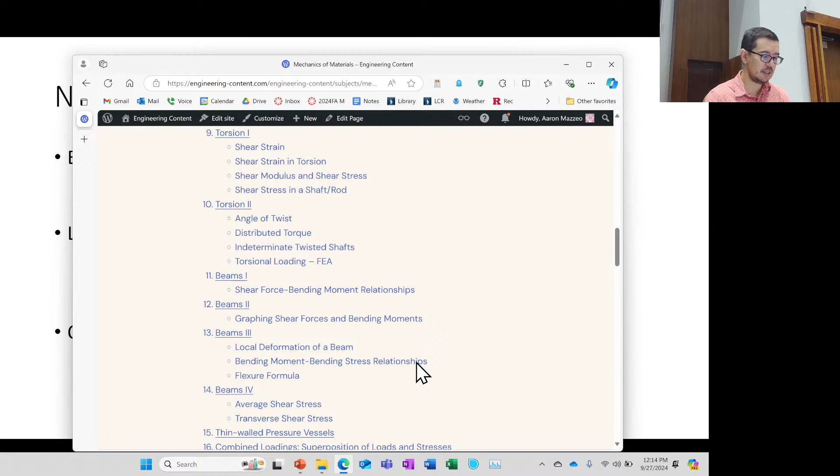Just so you have an idea, it will save you time in the short run, since it's only an hour and 20 minutes. But if you go down to the bottom of the page for mechanics of materials, you can go to the MechMat tensile testing and design lab, and take a look at these videos to get an idea of what we're going to be doing.

There's also a Colab page that will help calculate things like modulus of resilience, modulus of toughness, and elastic modulus — all those calculations are shown there. There are also questions you can download beforehand if you want a head start. On Canvas, what you'll be responsible for with the lab is in the bottom of the home page with all the modules, I think right above attendance.

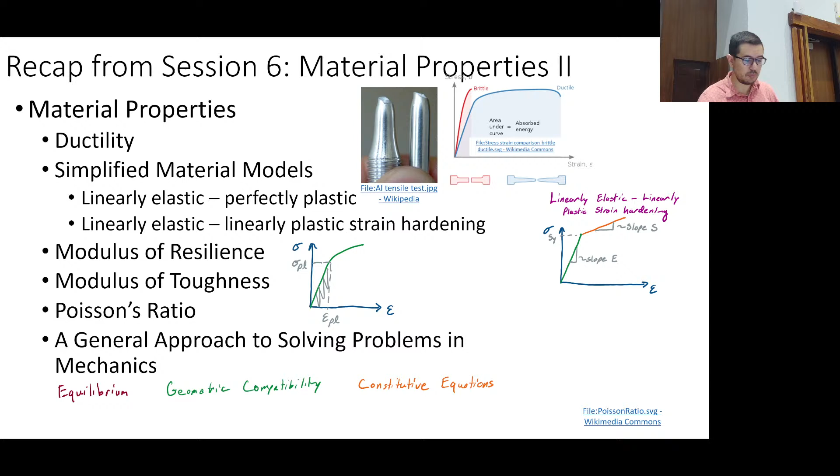Today we're going to continue a little bit in terms of describing additional metrics, or different ways we can characterize how a load affects a solid, and we'll introduce the bulk modulus, which is a material property, and it is also dependent on the elastic modulus and the Poisson ratio.

And then we'll get into distributed axial loading, and all of these things are under the general category of normal loading. Now you're like, wait, we already did axial loading. Yes, we did already do axial loading. Before we even go further, what could be a difference between axial loading and normal loading? Or maybe I can even say, what would be a difference between uniaxial loading and normal loading?

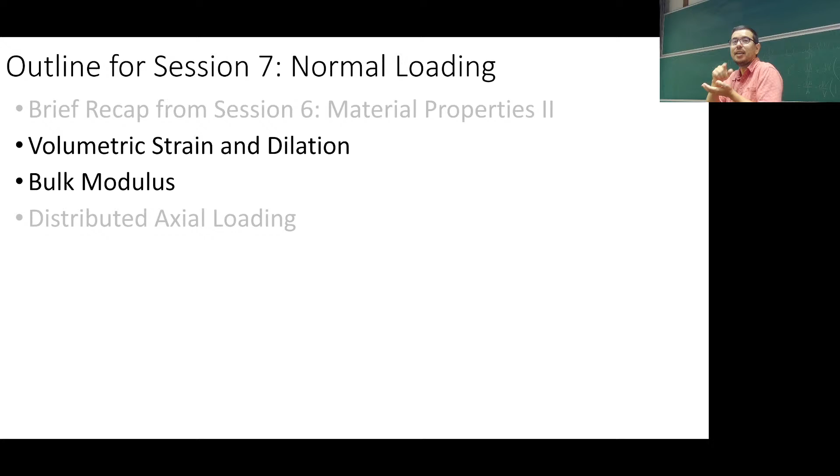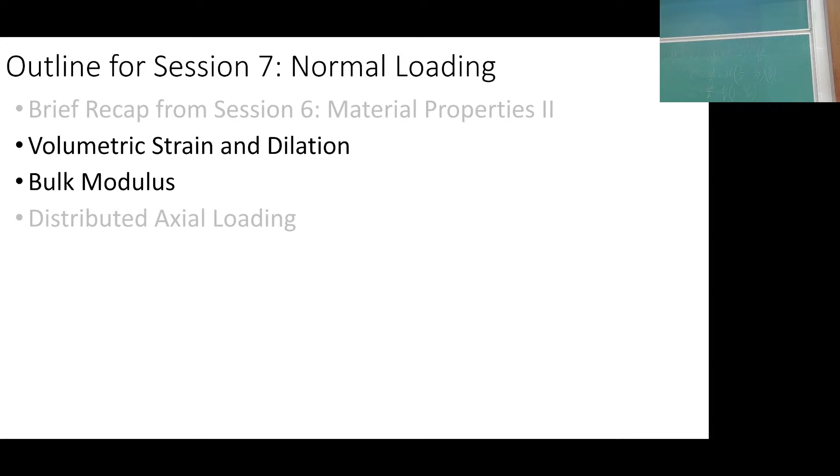Yes? The amount of forces on it. Can you be more descriptive, Mark? The axial is normal loading. That's right. So what Mark is saying is uniaxial or axial loading typically describes a normal force acting on one pair of faces on a, let's say, a 3D element that we're interested in. But normal loading could be acting on multiple of those faces at the same time with normal stresses and normal forces.

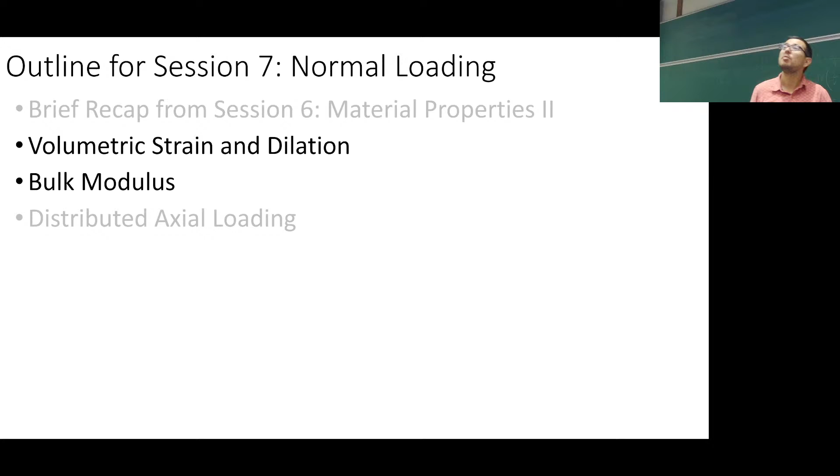Now, maybe we discussed it a little bit, but what is a pretty big example? How do I say this? What is a type of loading that is normal in nature, but not just uniaxial? So a type of loading that's not just uniaxial, but acting on faces normally, acting on more than one face at a time of a material element or of a structure.

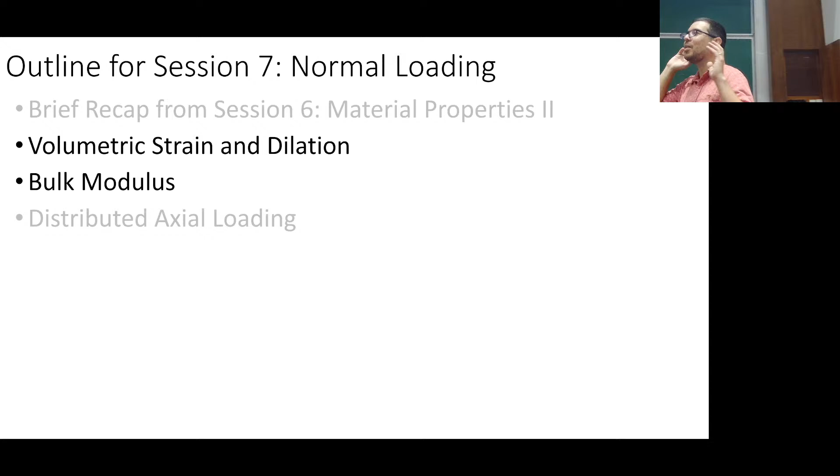I thought I heard someone, come on, who's murmuring it? Who's whispering? I heard it. What did you say? You can speak louder. Okay, I thought I heard someone say pressure.

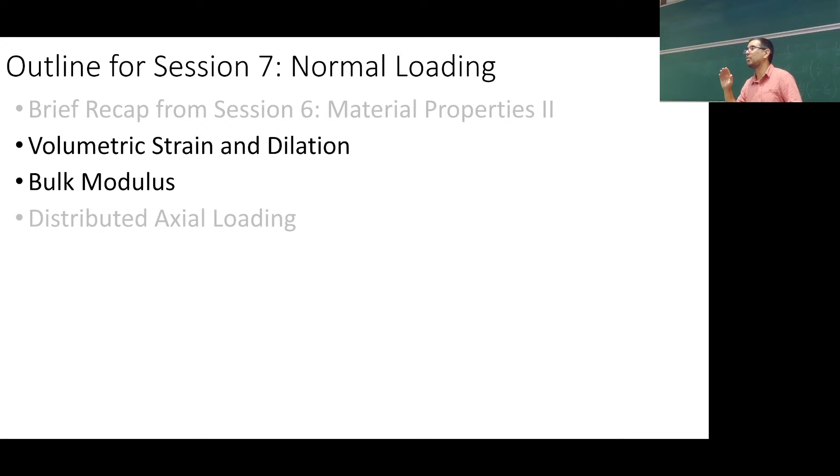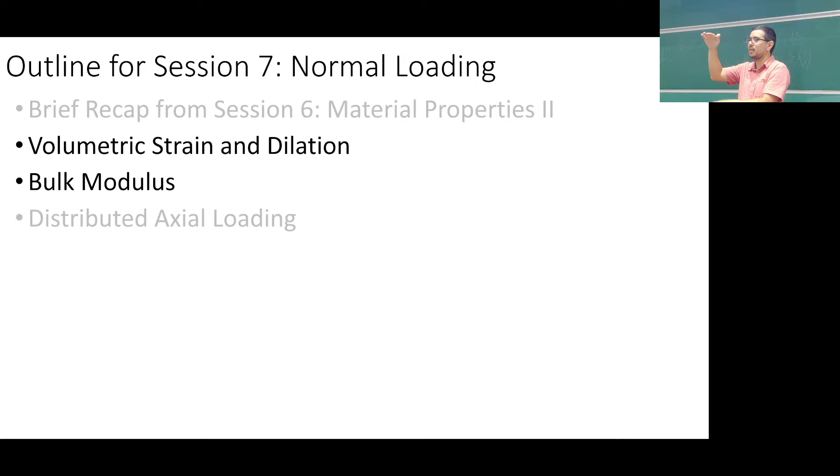Okay, yeah, pressure, right? Or hydrostatic loading. So we've talked before about dropping a rock in the ocean. And as it goes further down, as it gets deeper and deeper, as the depth gets larger, that would be an H. We do rho g times H, and that's the pressure surrounding the object, right?

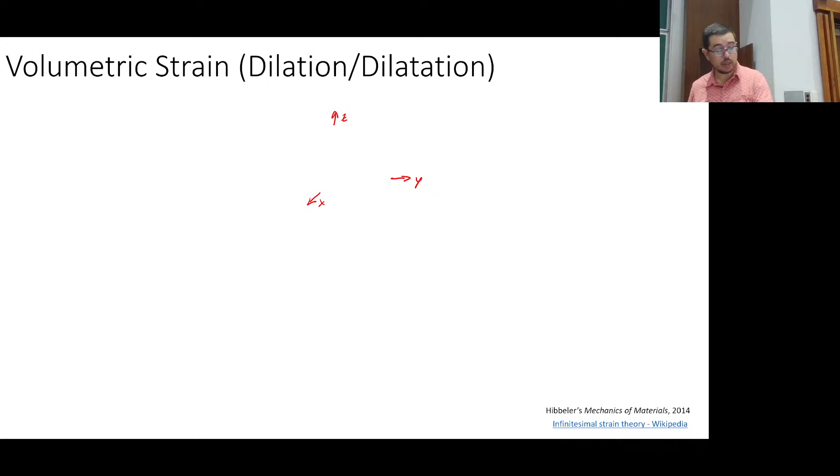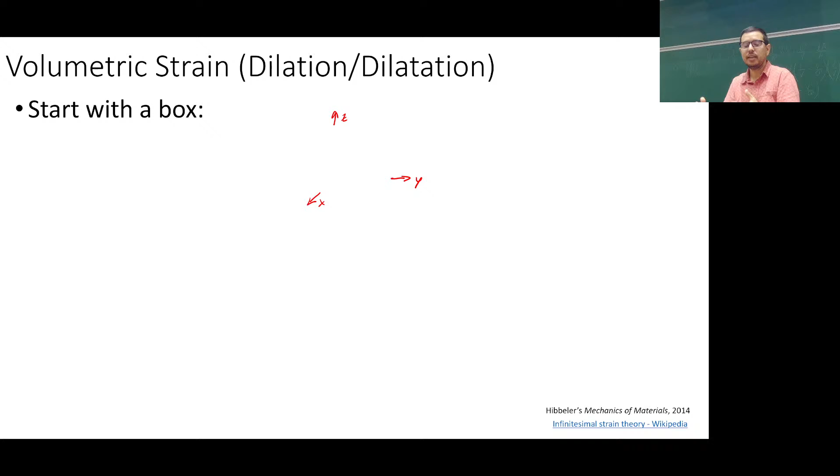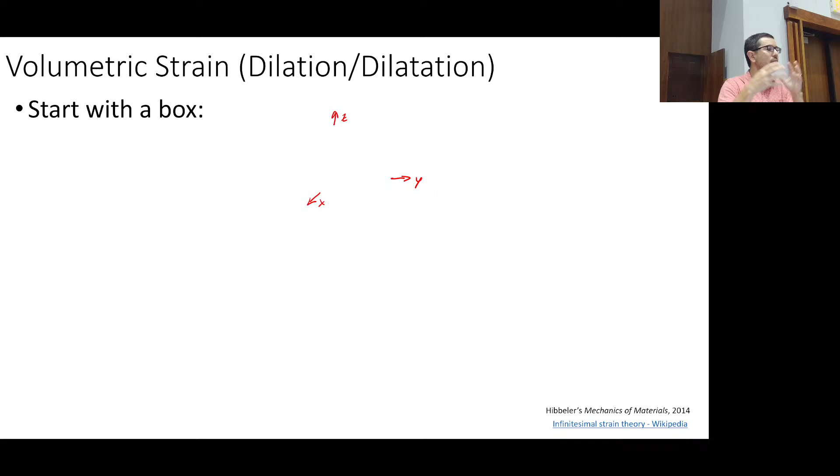So that hydrostatic loading is something that we often associate with normal stresses. So now if you had that box under pressure, like David Bowie and Freddie Mercury, right, it's under pressure. We could think about how is that box changing in its shape or in its volume? Let's start with a box. Here's a box, it has coordinates x, y, z, and it has some volume.

And when we define the volume, since this is a really small element box, we'll just say that it has lengths dx, dy, dz. So the initial volume is just V naught.

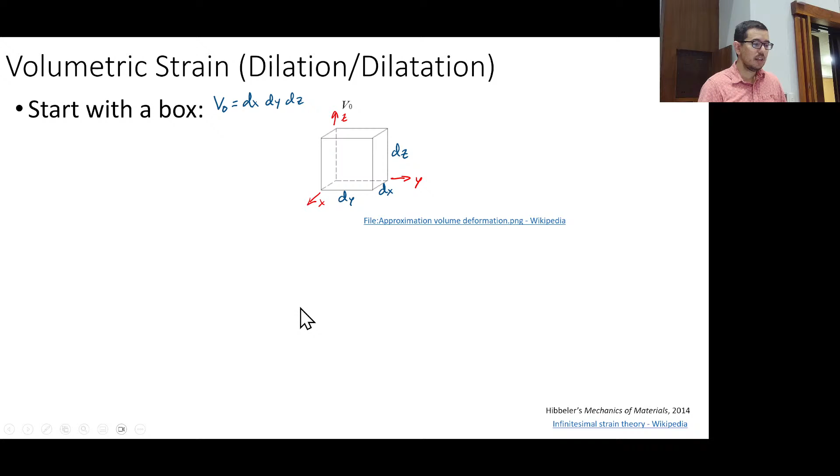Now, what if we apply normal stresses to this box? We're saying that we've now applied a sigma x, a sigma y, a sigma z to the pairs of faces in those particular directions, and the size of the box is changing. Sigma x acting outward and stretching this way, sigma y stretching it this way, sigma z stretching it this way.

We have, as you can imagine, a change in volume. So we'll say the new volume is V naught plus delta V. And if we write out the change of lengths that are contributing to that new volume, this may look a little weird, but we can write them out as 1 plus the axial strain, times that original length.

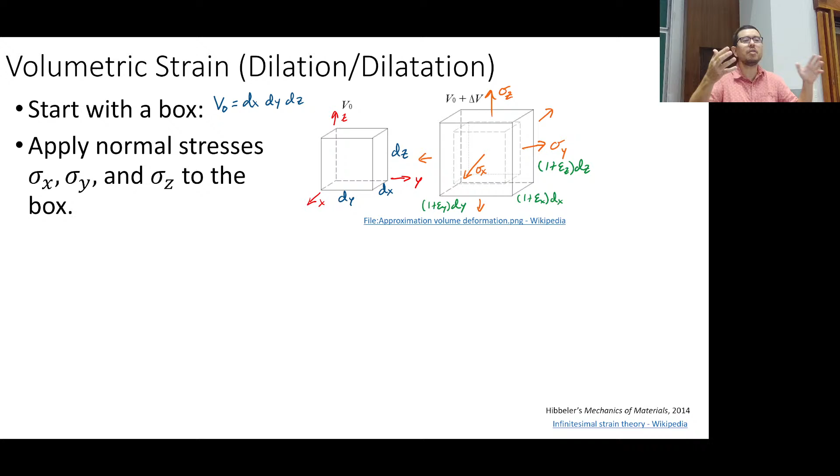Does that make sense? Remember, strain is the change in length over the initial length. Maybe it's easier to think of this as the percent increase or percent decrease of a change in length - it's not 100%, it's like 0.1%. So if I want the increase, I do 1 plus that, so that's 1 plus epsilon. Maybe I have a 1% increase, so now I have 101%. So I do 101% times my original length, and that's the new length. So that's all this is saying.

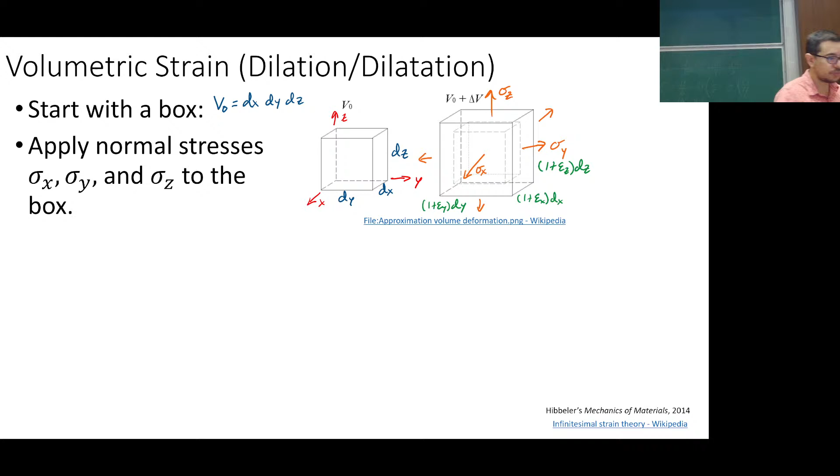What's the new volume then? Well, V naught plus delta V can be given by the product of all those new lengths. Isn't this fun? And so you get this fairly large expression.

And the delta V - remember we had V naught plus delta V, so V naught plus delta V minus V naught would give us just the delta V, the change in volume. So the change in volume ends up looking like this enormous expression. And then we can write this minus 1, times this.

And we can approximate - this is not exact. But if you do this all out, 1 times 1 is 1. But these epsilons are small. So if you do epsilon x times epsilon y, or these other terms doing FOIL or distribute however you want to look at it, once you have an epsilon squared term or epsilon cubed term, those are small relative to everything else. So we can ignore those, and in the end, what we get is approximately equal to the quantity of epsilon x plus epsilon y plus epsilon z times the original volume.

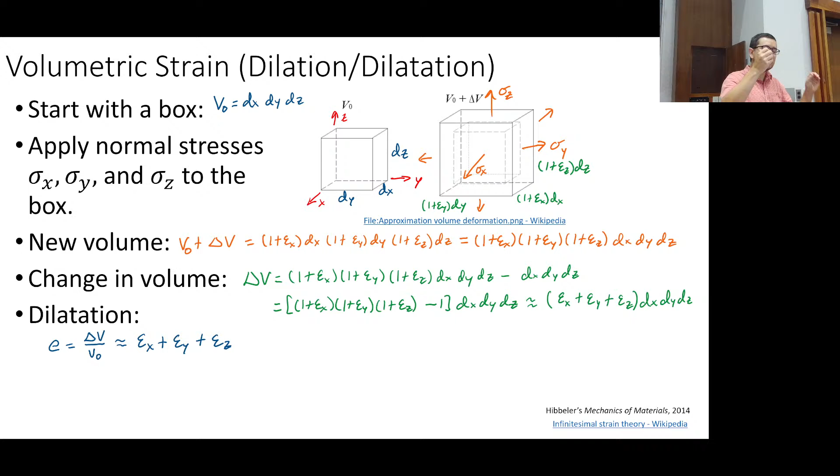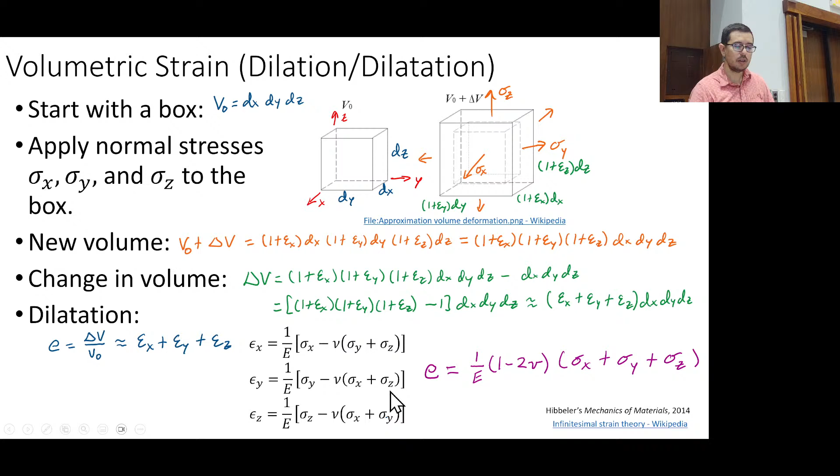Okay, so it turns out that if we do epsilon x plus epsilon y plus epsilon z, that's approximately the dilatation, the volumetric strain. This is what you get when we add all 3 of these together. You see the 2 comes in because there's a nu and a sigma y here, and a sigma y there, but no sigma y here, so we have to subtract 2 sigma y's. Just like there's a sigma z, we subtract 2 sigma z's in the Poisson ratio, and we subtract 2 sigma x's in the Poisson ratio. So you can see how this plays out, and we just have a dominant 1 sigma x in the epsilon x term.

Any questions on this? I should probably write that dilatation is just another way of saying volumetric strain, and I think the next slide says it too.

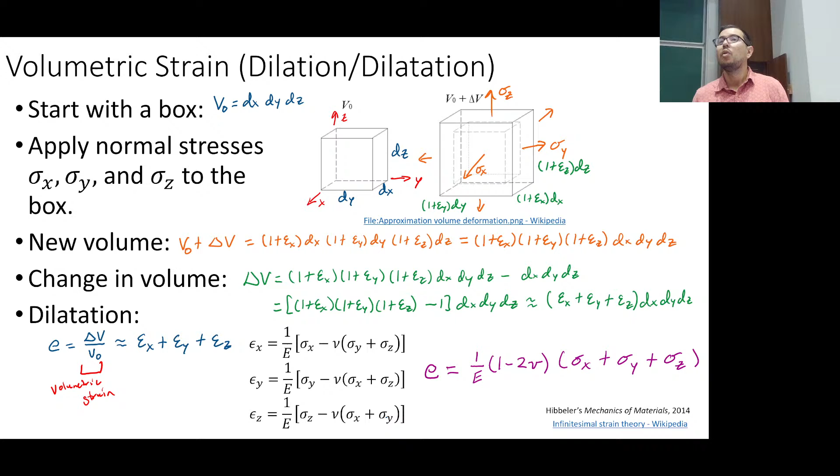Okay, so there it is, volumetric strain, and that's what it's defined as being if you have a sigma x, sigma y, sigma z.

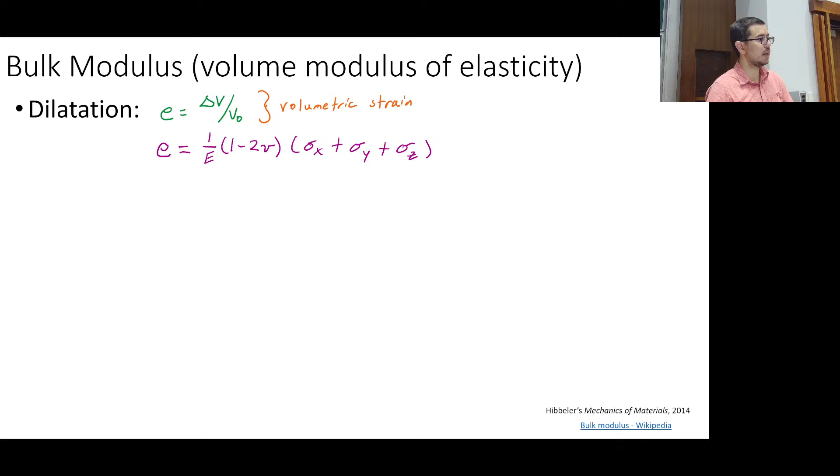Now, hydrostatic loading is essentially what we said about putting an object underwater, or putting it in a vacuum chamber, or putting it in a pressurized air chamber. That's going to be hydrostatic loading.

Anyone that's flown on an airplane has been loaded hydrostatically. Anyone that's jumped into water or gotten their head under... I think I'm too big, or maybe the tub at home is too small for me to fill completely and be fully submerged. But even if you don't know how to swim, which if you don't, don't do this experiment, you've gone down. If you know how to swim and you've gone into a pool that's like 6 feet deep, what happens to your ears when you get down there? You feel that pressure on your ears. Okay, that was unrelated.

All right, so with hydrostatic loading, what we have is that all the stresses on the 6 faces are the same and they're inward, so we have negative values, at least if we're defining sigma x as positive outward and sigma y as positive outward. So all of these values just equal p.

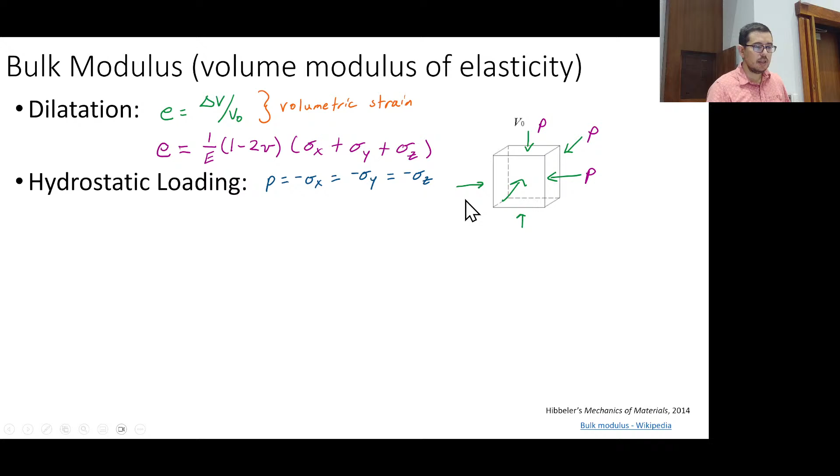And so if we want to describe the volumetric strain in terms of pressure, we just plug in the p's here, and we get minus 3p for this term, and the rest is as we had it before.

This quantity is somewhat interesting, and we can describe a relationship that's kind of like Hooke's law for uniaxial stress and strain. Remember, Hooke's law for uniaxial stress and strain is just sigma equals E epsilon. Well, we're going to say instead that P, which has the same units as sigma, is equal to minus K times the volumetric strain. So before we had the analogy, sigma equals E epsilon, and you can see how they map: P goes to sigma, volumetric strain goes to uniaxial strain, and K is just like E.

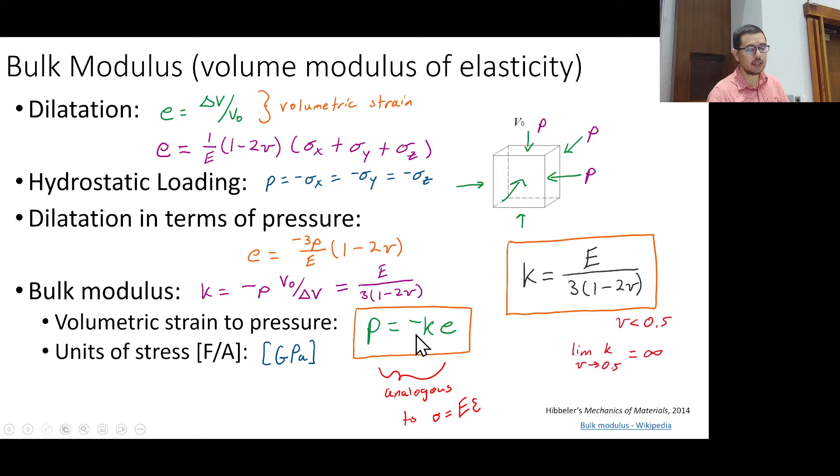Okay, it is elastic modulus, but that's what we're getting at. So if you take a piece of rubber, let's go back to this. Large K means that if you put in a ton of pressure - that's a bad thing to say, because ton has units of newtons or pounds force, a ton of, but okay, you got it - you put in pressure high, and you get low strain.

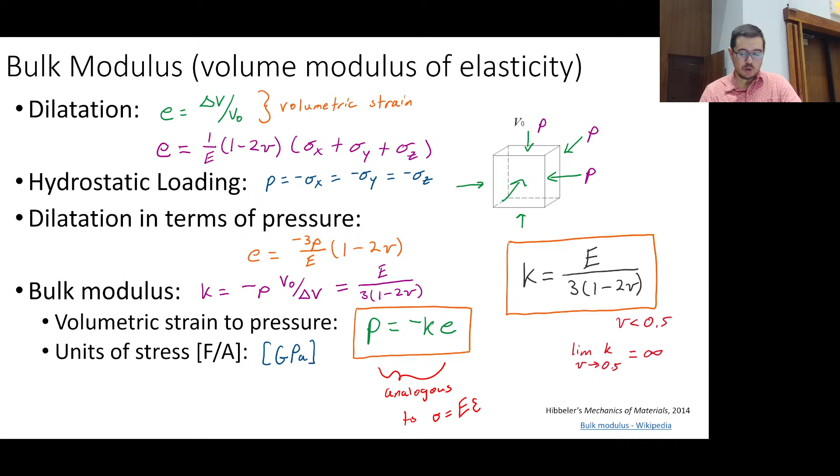So that might be kind of counterintuitive, because rubber is just rubbery, right? But there's actually very little volumetric strain underwater. Who or what takes advantage of that? The little fishies.

The silicone rubbery material, because it has a high Poisson's ratio - and what does a high Poisson's ratio mean? It means that if I pull in one direction, I get a lot of contraction in the other direction, or if I push in one direction, I get a lot of expansion. That's what a high Poisson's ratio means. And in particular, volume is conserved when the Poisson's ratio is 0.5. So that means if I push in over here, I might change shape, but the whole geometry conserves its volume. Not so much with these other materials, the ones with the lower Poisson's ratio.

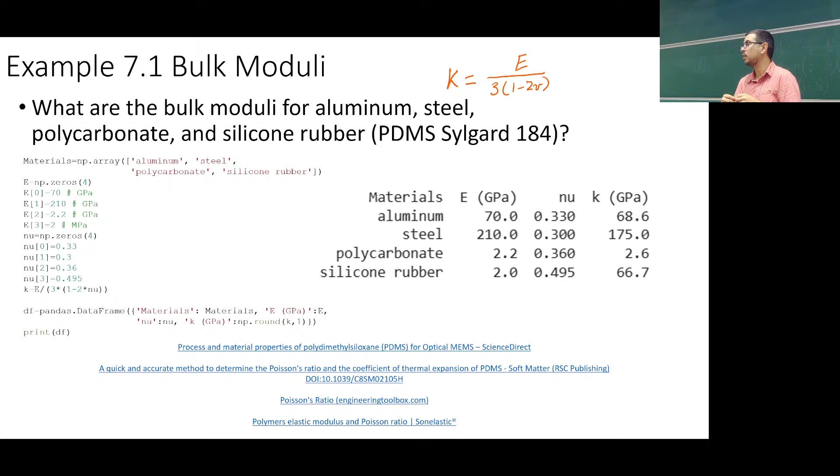Any questions on that? All right, any thoughts? Maybe your appreciation for rubbery materials has gone up now because they have a high bulk modulus.

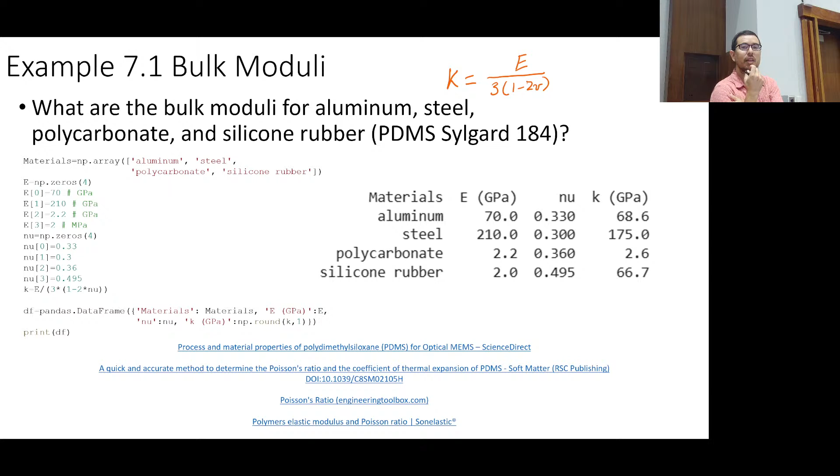And you don't want to mess with some of these because... that's very vague, all right.

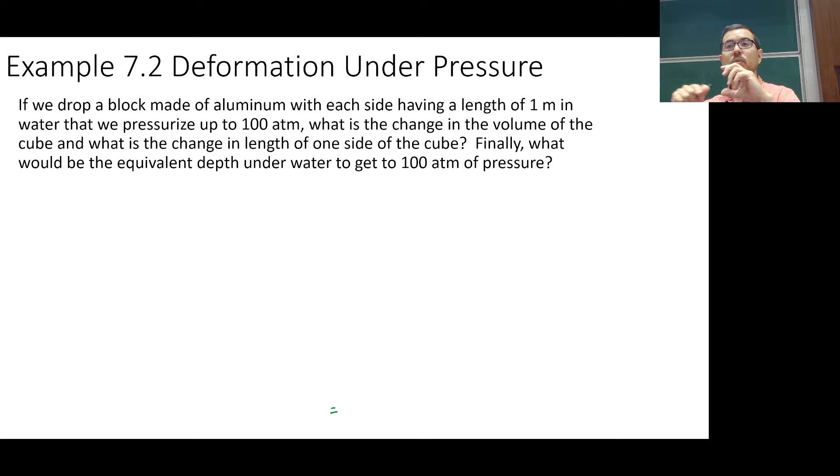I'm just thinking about O-rings. They're often made out of rubber, Viton, silicone, butadienes, these types of materials. And they actually also are temperature sensitive. We use them because they conserve their volume, so they can seal around an object, like in the solid rocket boosters of the space shuttle. But if it gets too cold, it will lose some of its elasticity and become stiff. Feynman put an O-ring in cold water to demonstrate this principle, that it becomes stiff, and that can cause issues with sealing and people's lives.

So rubbers have a very special material, and we need to take care of them when we use them in design. There are booklets and things on how to design O-rings, and I think there's a bit of art, to be honest, when you start playing around with the rubbers.

How do we differentiate between the K for the bulk modulus and the K for the spring constant? I'll tell you, one's the bulk modulus and one's the spring constant - no, they're not, they're definitely not. Spring constant K is in newtons per meter. And this one, as we said, is in units of pressure, so newtons per square meter. So definitely not the same. Thank you for that clarifying comment.

If we drop a block made of aluminum, with each side having a length of 1 meter, and it goes up to a pressure of 100 atmospheres - so that's pretty deep - what is the change in the volume of the cube, and what is the change in length of one side of the cube? Finally, what would be the equivalent depth underwater to get to 100 atmospheres?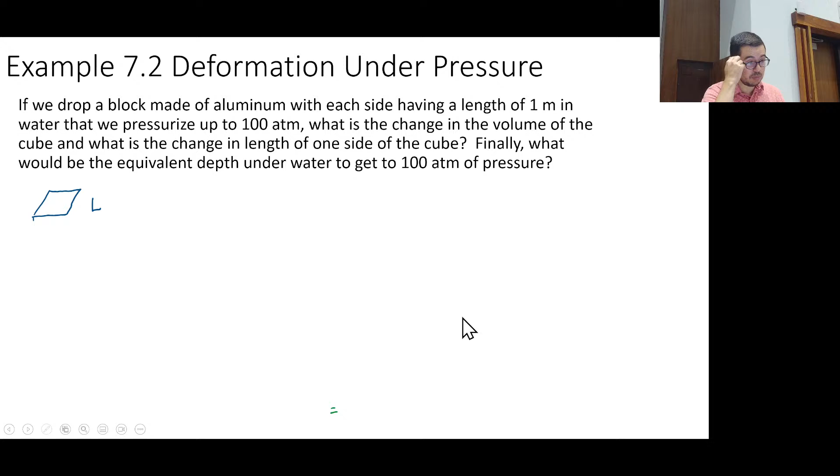Okay, so let's do some drawing, some calculating, some thinking. All right, and we have here our lovely cube, and thankfully it's a cube, so all its sides have the same length, L. And we're just writing things down now.

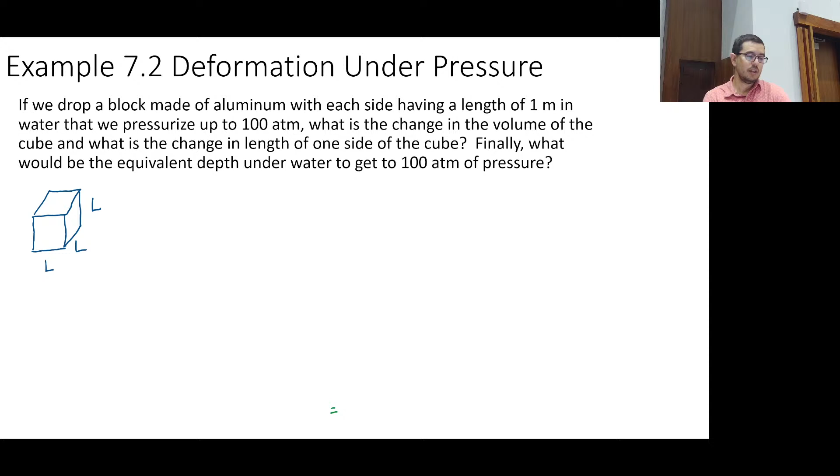So we have a pressure of 100 atmospheres. We have a bulk modulus of about 69 gigapascals. And there are questions about, hey, what's the change in volume? What's the change in length? And what's the depth that we've gotten to?

So here is the pressure acting on that box, on that cube. And let's kind of break it down into the 3 columns. Sometimes we're kind of making a round hole fit into a square, I feel, when I write these 3, but nonetheless, they do help make sure that we've got the necessary elements addressed to work on this problem.

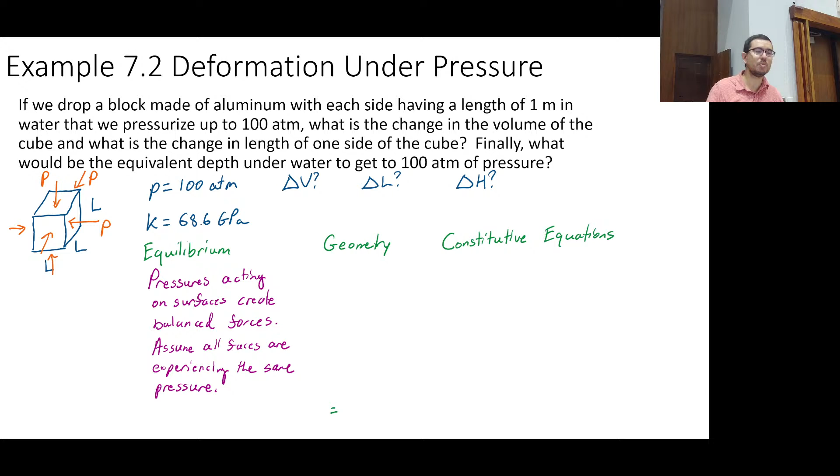So for example, do I need to really draw a free body diagram to show that the cube is not accelerating? Probably not, okay, but that's equilibrium for you. Geometry, it's kind of helpful, I think, to write this out.

We're squishing on every side, and in this case, it's not a rubbery material, but it can have a high bulk modulus, and it is going to be going inward because I've got stresses pushing it in, and the Poisson ratio is causing that to happen. There's going to be less of the lateral contraction, or less lateral strains, than there will be of the actual axial strains.

So we can write out that the volumetric strain is this delta V over V naught, and we could think of that as a constitutive relationship, or you could think of that as a geometric relationship, really, and maybe it should go more under geometry. But this is definitely a constitutive relationship - anytime we write out something that's Hookean, we put it under the constitutive side. Hookean would be describing anything that describes a relationship between a change in geometry and loads.

So it's one of the big things that you did not do in statics - you did not talk about deformation. And there are problems that you could not solve. All the problems you solved had to be determinate, meaning through equilibrium, you were having the same number of unknowns as a number of equilibrium equations. But now, you may not have that. You've seen that a couple of times now with these bars stuck between walls - these are indeterminate systems, so there's no way to solve them purely by equilibrium.

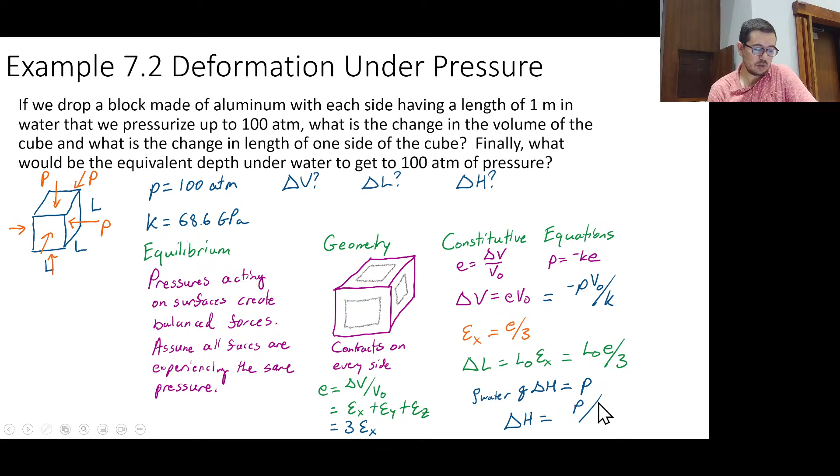Pressure underwater, this is back from physics. We won't necessarily derive this, but you can think of it as the density of the water, or whatever the liquid is, times gravity, wherever you are in the universe, hopefully on a planet with significant gravity, and then a change in height. That's going to be equal to the pressure. So the pressure is equal to rho times G times the change in height.

We can plug these values in, and what do we get? We get that the change in the volume is minus 150 centimeters cubed. The change in the length is about 50 microns. And to get to 100 atmospheres, you got to be 1,000 meters underwater.

Any questions on this? Yes?

Okay, good question. When you start talking about 1,000 or 100 atmospheres, it doesn't really matter, because it's like 1 atmosphere versus 100 atmospheres, 99 versus 1%, right? But typically we're thinking more in terms of gauge pressure, so what is the relative pressure between surfaces. This becomes more important when we look at pressure vessels, where we care about the difference in pressure between the inside and outside. But here, everything's under the same pressure. Maybe I'm confusing people. The inside of the box, that's solid, the water, it's all at the same pressure. There's no change in pressure. What you're referring to is, is it 100 atmospheres relative to atmosphere at sea level, or should I tag on another atmosphere because there's 1 atmosphere at sea level and then 100 atmospheres underneath? So it's like 100 versus 101. That's what you're getting at.

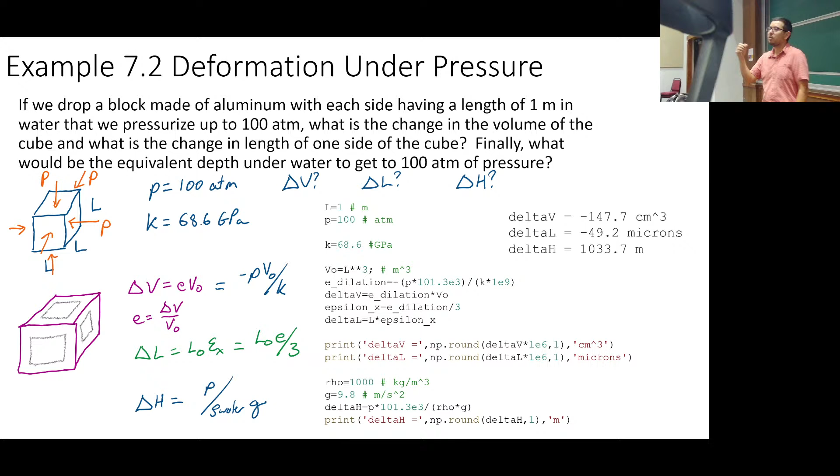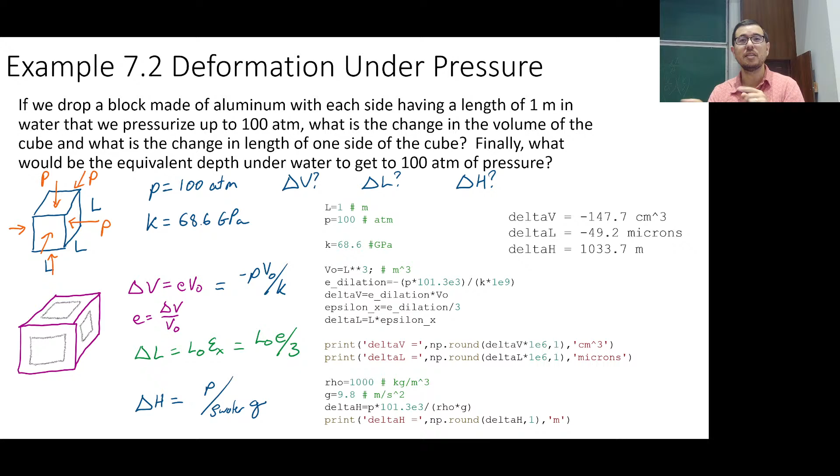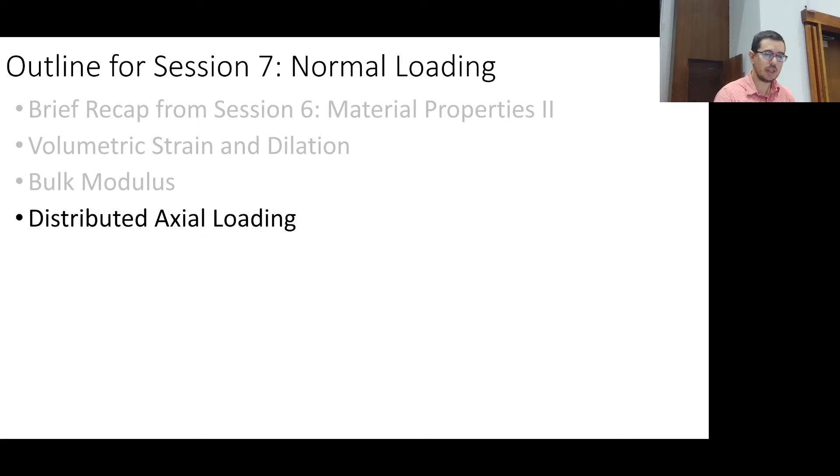So write these things on your formula sheet or your sheet of notes. A lot of it, with these types of problems on volumetric strain, dilatation, and bulk modulus, is just looking at the equations and substituting things in. But they do make sense, and there is physics behind what's happening. There will be a question on the assignment for you to pursue. This topic tends to be a little bit more confusing, and it's important, so this topic definitely is fair game.

You can take a look at, I think it was, problems from the 2015 exam 1. That problem was probably a little bit rough. We'll actually go through some of it today. I changed the notes a little bit to cover, I have like 3 examples that I think are kind of interesting. The third example is maybe less relevant. Well, it's relevant to a particular area, but the first 2 examples are definitely for reals.

Okay, so axial deformation in a bar. Have we already covered this? In some respects, yeah. We know how to calculate the delta if you have a uniaxial load, so that's not going to be too new, but we're going to introduce a new equation that you can use to show the same thing that we already knew. I'm talking about delta equals PL over EA. But we're going to introduce a new equation that helps us in a more general case to solve for this deformation in a bar. And if you like, you can go to Hibbeler's book, chapter 4, and see the derivation.

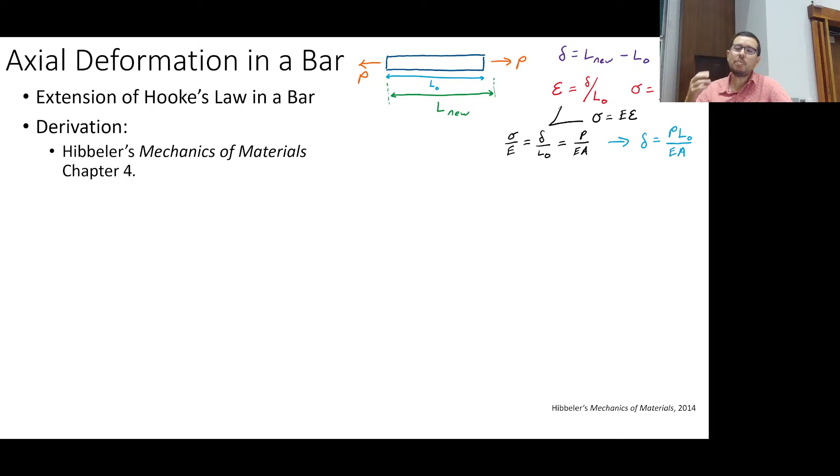We've seen this before, and we've just derived it. We derived it pretty much just by using the definition of strain and saying, hey, the strain that you have in this long bar is going to be the same throughout, for this particular case, because the force is the same throughout.

It doesn't have to be that way. We'll show you in a second when it's not. But when the force is the same throughout that bar, this is a great way to calculate what the displacement is. Now let's go and break it down a little bit more.

Let's look at a chunk of this bar, and let's say that chunk has the same forces on either side. It's in tension, we'll say if P is positive, and it has a pretty small width. We'll call that dx.

If we look at this little chunk and the amount that is being pulled apart by this internal force P, we can say that it has a little, not a delta, but a d delta. You get where this is going. We've broken it down into a small element, and we have a little amount of strain there.

The bar has a lot of these little chunks in it, and I can think of lots of d deltas along it, and they're going to sum up to being the overall delta. So you're like, oh, that's Riemann sums. Okay, great. Or if I go like mini intervals, this is integration, I'm integrating all these little chunks to get the overall displacement.

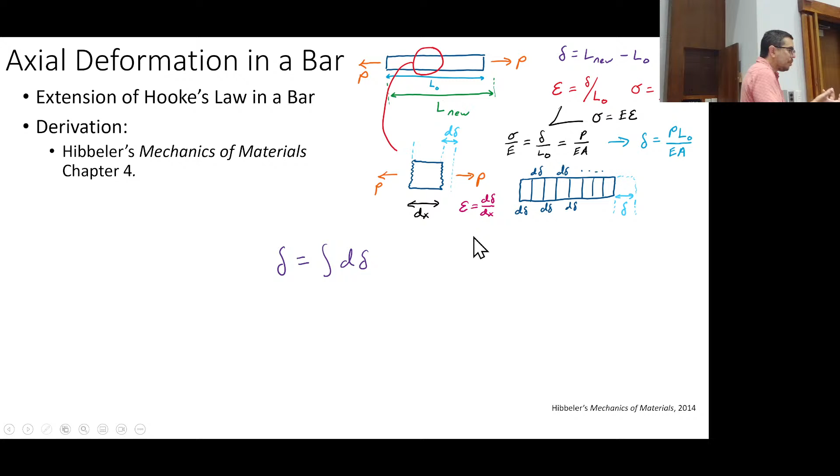d delta is going to be related to the strain that this material is experiencing, the uniaxial strain. So we have epsilon, which is just the change in the length over the length, except now we're at the micro level. Epsilon is still an epsilon because it doesn't really care about the size, but now we're saying this is the strain at a micro level or a nano level, whatever, very small level.

So we go ahead and say d delta is equal to epsilon dx. And if I look at the definition of epsilon, that just goes back to Hooke's law right here: epsilon is equal to sigma over E. Plug that in. I know what sigma is, that's P over A. And now I have an interesting integral.

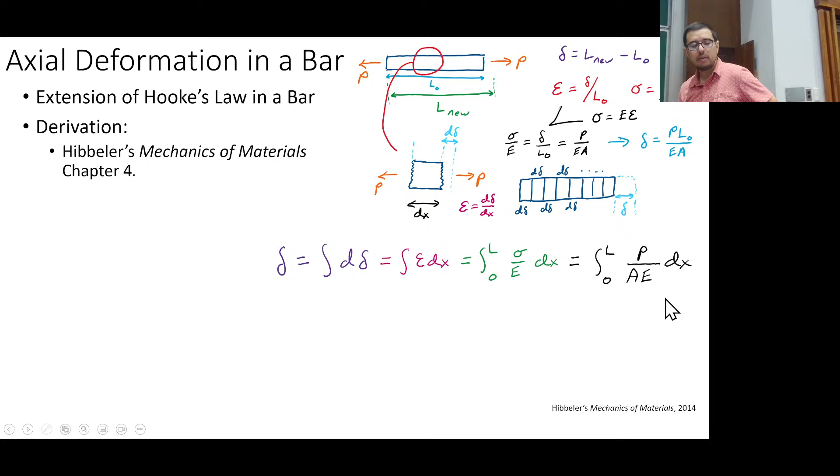The integral across this whole thing from 0 to L of P over EA, or P over AE, dx. This is an equation that you want to write down. Now, this form is, I guess, what Hibbeler uses and maybe more widely accepted. They just say, look, it's not P times x, it's not A times x, it's just that P can be a function of x.

A can be a function of x. So now we've got something kind of interestingly powerful. This pL equation is just for when you have a constant cross-sectional area and when P is constant. But this equation is applicable to an internal force, so we think of p of x as a force internal to the bar and A as being a cross-section.

So if you were given a problem where it says this is the function that describes the cross-sectional area as we go along with x—maybe it's a cone, maybe it's a sinusoid, whatever it is—as long as you have it as a function of x, you can put it in there.

Now if it's a function of x, that's a bummer because now you're integrating with respect to x, so you have to integrate it appropriately. But if A is constant and P is constant, then it's just Px evaluated from 0 to L, and it spits out this thing again, PL naught over EA.

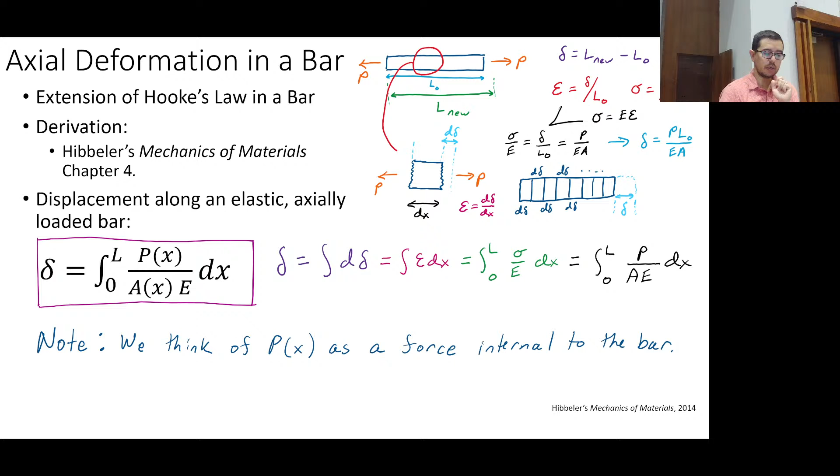So there was one other thing I wanted to say... yeah, we're good. Just that P is a function, P is an internal force.

Let's look at a system of a hanging bar. This is an instance where we have gravity acting over the bar. Now before we even do this problem, let's think a little bit.

What do you think the force looks like in this bar? Internal force, what do you think it looks like? Okay, so it's going there, downward. Yes, what else? Can you be more descriptive? Internally.

My first question, and you probably already know the answer: is that force constant along the length of the bar? No, it's not. So that's first, not constant. But let's think about it for a second. Up here at the top, maybe it's easier to think of it that way. How much force is the wall putting on that bar to keep it from falling? The weight of the bar, just mass times gravity.

So at this location right here there's got to be an equilibrium. That external force is going to be equal to the internal force right next to the wall. You see that? And that makes sense—it's like saying, I'm holding this object here, how much force am I putting on it to hold it? It's just the mass of this thing times gravity. That's what I mean, it's a weight. Be careful—it's not kilograms, it's not slugs, it's a weight.

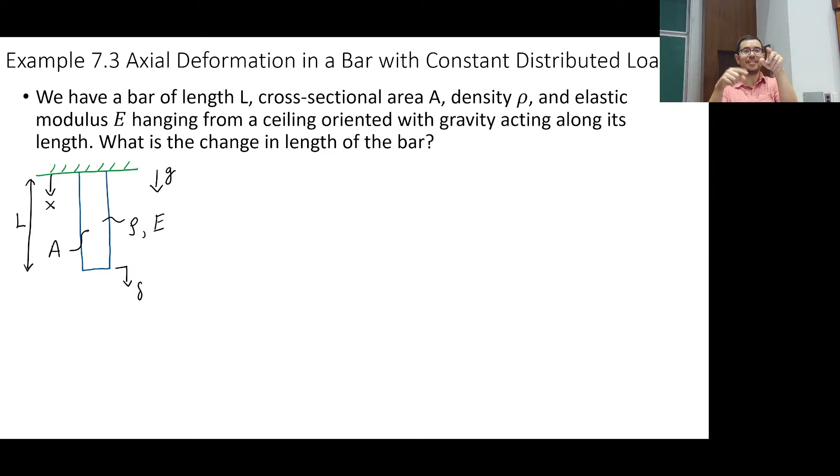So it turns out that if I'm looking at the internal force of this hanging bar, we're no longer doing the uniaxial test where I've got a force applied on both ends. When I do that, yes the bar is hanging from the top clamp, but I'm applying so much more force to pull it apart that I neglect gravity when I put it in the material testing machine. The mass of these objects compared to the weight is so much less than the amount of force we're putting on it during normal uniaxial loading.

So we have an interesting perspective on what the force might look like. And you're like, is it linear? Well, probably so, because it's zero here, and it's going to be mg up there. So you've got this idea that it's going to vary linearly.

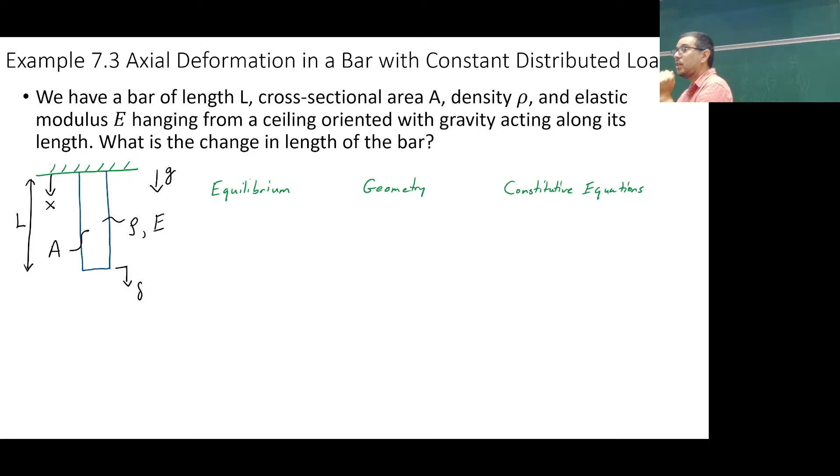Let's break it down into our three categories: equilibrium, geometry, constitutive equations. Let's start with equilibrium—we're going to spend most of the time looking at equilibrium here. What's the first thing you do when you get an exam problem and there's a statics question? What do you do?

Equilibrium, yes, and specifically external equilibrium. So let's look at external equilibrium. We already kind of talked about this, right? But the external equilibrium is with two forces.

The wall pulling up on the rest of the bar, and gravity acting on the bar at its center of mass, we'll say. Now it's acting at the center of mass, but don't be confused—that's not like when I look at this thing internally, it's only acting there. No, this is just an external equilibrium that we're performing here. So we know that R is equal to mg. Now, what did I write there below it?

Rho g L A. This is a weird one. You're like, what? Well, you remember we were hanging those pieces of acrylic in the homework, right? And we said that in order to calculate the weight, you had to do length times width times height to figure out the volume, and then you multiply by rho, and then you multiply by g. This is the same exact thing. What we're saying is there's a length to this, and we have a cross-sectional area, and we got to multiply by the density, and we got to multiply by g, right? And that will give us this mg.

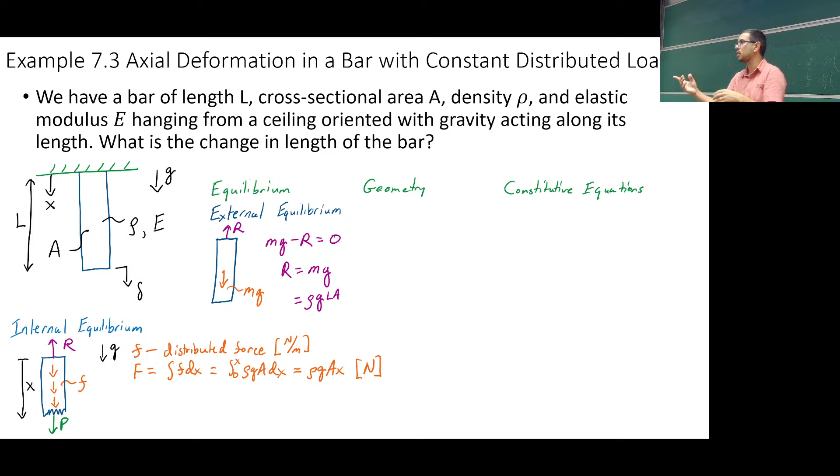You see that? This distributed force, if I just take out the length, I get rho g A like this. And this, you can kind of think of it as—hey, what is this distributed force? I've got some density, I've got some gravity, and I just have the cross-sectional area. So what is that distributed force essentially per unit length? And the length is in the vertical direction, so I'm using the rho, the g, and the cross-sectional area. You can think of it that way because that's what equilibrium tells us.

So let's do it out. We're going to sum the forces in the x direction, and let's say this is the x direction. So P is positive, F is going downward, that's positive, but R is negative. So we have P plus F minus R. So like you said, P is the rest. What is P going to be equal to? It's going to be equal to R minus F.

And so R minus F—this is the R, and we just calculated that rho g A x is the leftover force from the distributed force. We did that integral out, and so we get this expression. You see that? So, does this make sense?

If x is equal to L, remember we said at the bottom, the internal force is 0. So when x is equal to L, it's 0. When x is equal to 0, up here, the internal force is rho g AL, which exactly balances out the rho g LA we calculated for that reaction force.

This is a little confusing. The most confusing thing is what to do with the distributed force. This idea that you have a rho g A, it's like a force per length, not force divided by area, but a force per length. And that is given by rho g times the cross-sectional area. That's probably the most confusing part of this problem.

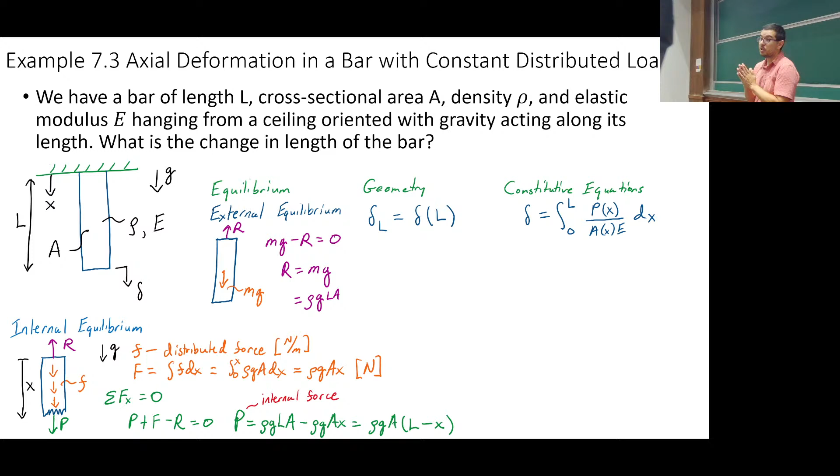Constitutive equation - this one we do want to write. Remember Hooke's law. These equations, and now this new one with the integral form for displacement as a function of axial loading - this one we can write out as our constitutive equation. What do we know now? We know P, and P is a function of x. We know A, given as cross-sectional area A, it's constant. And E is given as an elastic modulus. So we've got everything we need.

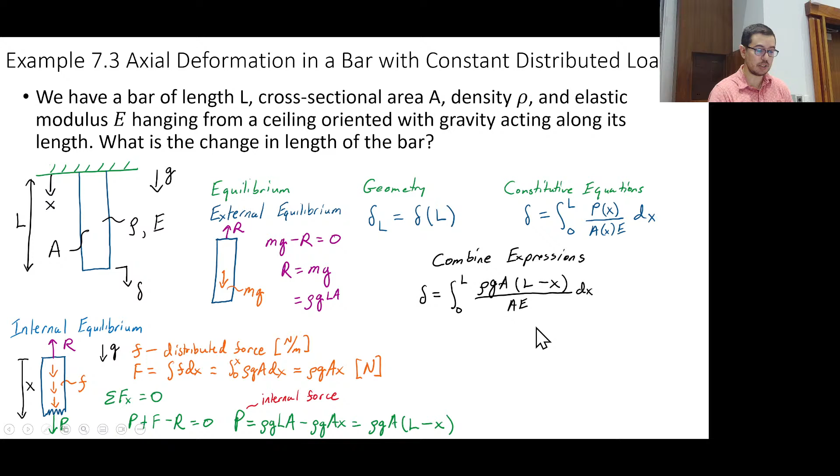Before we just had a constant for P, so it was kind of trivial that it was just going to be PL over EA. Now our P is in terms of x, so the integral is non-trivial, but not that bad. We can say that delta is going to be the integral from 0 to L of this whole expression. Don't forget that you had to integrate this constant, the rho g AL - that's a constant, so we have an LX, and then we have 1/2 x squared, and we go from 0 to L. The A's cancel out, interestingly enough, and this is kind of... it's not an expression I go home and think about every day, but it's somewhat famous.

Any questions on this? All right.

So this is essentially the equation that would tell you how much taller you would be in microgravity. If I'm in orbit, I don't have this gravity. And if I assume I have some elastic modulus and some density, and all these assumptions, that I have a somewhat uniform cross-sectional area, I could figure out how much I'm shrinking just because of gravity.

My understanding is that we're supposed to be taller at the beginning of the day than at the end of the day. Sometimes when I get into the car, psychologically, I'm like, oh, I got to back up the seat a little bit more because it's the morning, I'm taller right now. I think that's just psychological, probably because I wasn't wearing shoes a few minutes before. Do you ever think like that? Or maybe I'm just standing up taller - in a mirror I gotta adjust everything, like it's a great day. Then at the end of the day I don't know what happens, I guess I'm just slouching.

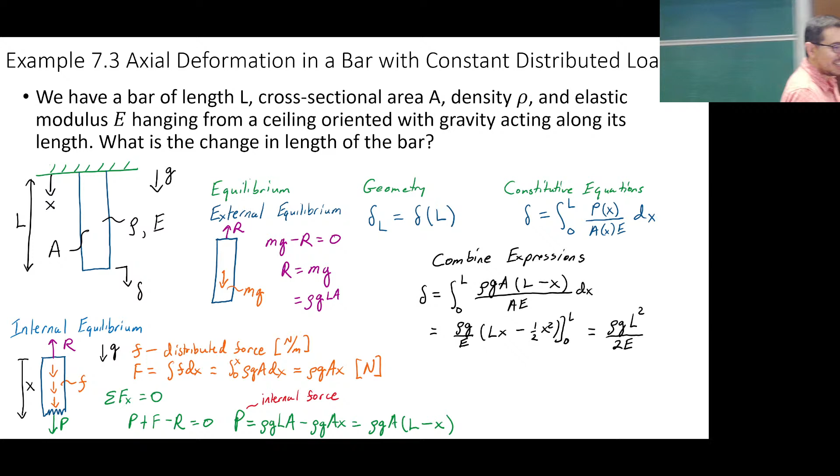Let's do another one, we have time for one more. This one is a doozy. I should not have put this on the first exam I gave to students ever in mechanics of materials. But you can see it - it's 2015, question 1. But I was excited about it, I was like yes, this is awesome.

You can figure out how much - well, actually, what is this question? What is a real life application of this question? Just read it and think about it for a second. What is a real life application of this? Centrifuge - yes, good. So centrifuge, and what else? What are some others? Yes, it is - we're dealing with a centrifugal load.

Any other applications that come to mind? Yeah, wind turbine, right? Exactly. So you've got these vanes coming off, and you're spinning pretty fast, and they're really long, and you don't want them flying off and breaking.

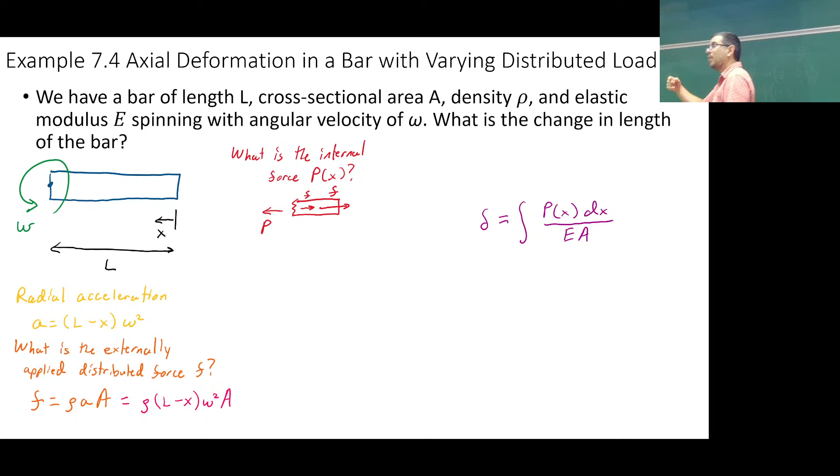And we also know that we have this distributed force coming out here. It's a little bit interesting too, right? Because you're like, oh wait, actually when x is equal to 0, that distributed force is really high. True statement, because as you get farther and farther, it's really high. But if it has no mass to work on, it doesn't matter. So what do we do here?

We write out this equilibrium, P minus the integral f dx. And I sliced here, right? It's probably nice to slice this direction because now I don't have to worry about the reaction force at the center. Because it's not trivial to calculate what the total reaction force is, actually. It's easier to do it afterward. It's not super trivial to do it now.

Because once I solve everything out, the internal force - if I do this out, I guess it's not that hard because now I know what it is. It's the integral of f dx. And so I solve this all out, and now if I plug in x equals L, now I know what the total force is acting on this thing because of acceleration. I plug in, so I get L squared minus one half L squared. So it's L squared over 2 times omega squared A times rho. That's the total force at the middle. And of course at the right end, or at the tip, that force is equal to 0.

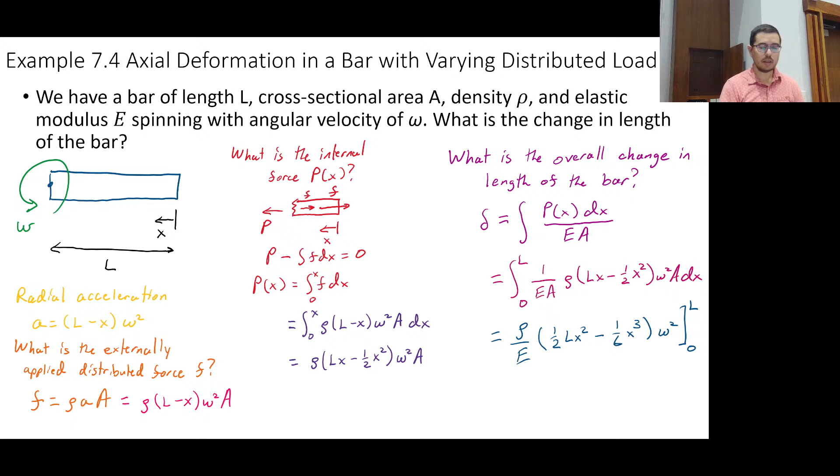What do we do? We just plug it into our constitutive equation. What is the overall change in the length of the bar? This is the easy part. The integral is the easy part because we've now got a great expression for P, and we just write it out like that. And voila, this is the answer now. So there you go. This is not something anyone remembers, but it's something that you can calculate.

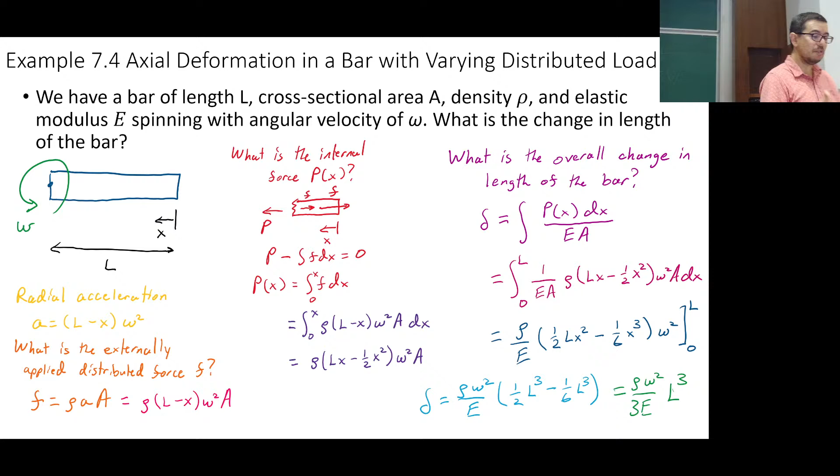And something that you will get to calculate on the homework. Woohoo! Okay, so there are a few homework problems.

What did we do today? We went through volumetric strain and dilatation - dilatation, it's kind of like dilation - bulk modulus, safety factors, and distributed axial loading. I hope you liked it.